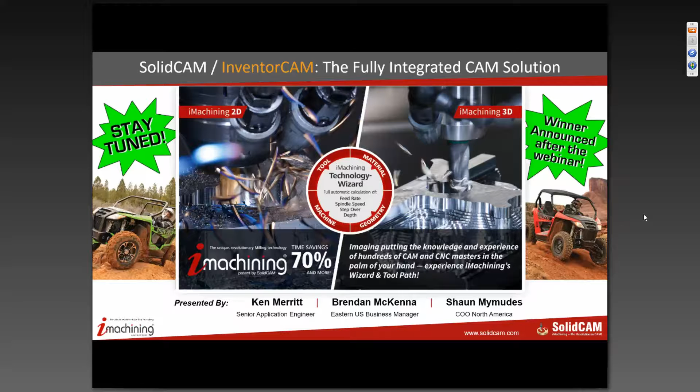This will feature a live cutting demonstration that highlights the advantages of an integrated CAD-CAM system, and in particular the advantages of the company's iMachining technology. This technology can lead to reduced cycle times and tool wear, and it can also simplify programming and enable automated calculation of optimal machining parameters, which we'll see during the demo.

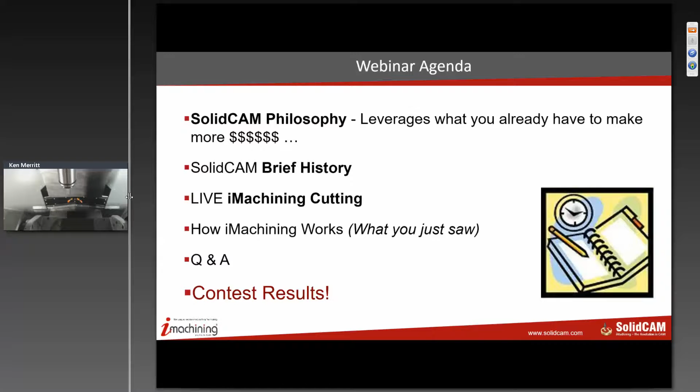So let's start. SolidCAM philosophy, if you ever talk to the owner, which I do often, I do have that privilege, and he's constantly saying our goal is to allow customers to do more with what they already have. And I think that's what sets us apart, is that we're not going to talk about the new stuff that you need, and if you had this, you could do this. The idea is to do more with what you already have, and I think you're going to find that refreshing.

Now, the first thing is, he did start off with his own CAD company, and he was doing CAM and CAD, and then he decided, hey, there's a wonderful program out there called SolidWorks. You folks may have heard of it, and we were one of the first to be a certified gold partner. And that is a huge start for us, because we said, well, let's let people use that great CAD system they already have to be able to do more, basically putting the CAM functionality right at their fingertips. So we were awarded the gold partner status, and then we were actually given the ability to sell an OEM bundle so that SolidCAM can go ahead, and if you do want the SolidWorks, if you don't already have it, you can do both.

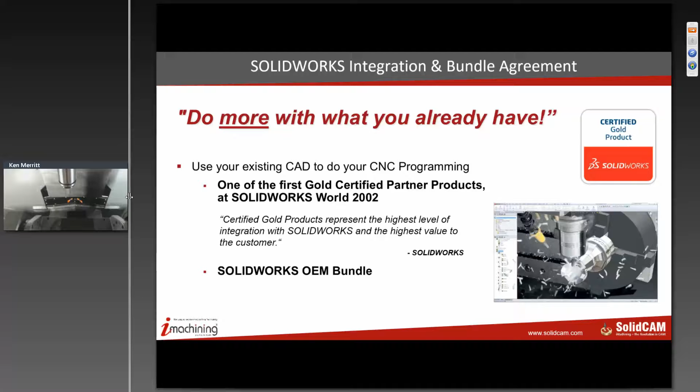Now, the benefits of SolidCAM as a SolidWorks Gold product is that it's the same style graphical user interface. It's going to feel the same to you. We do have other products we're going to talk about the integration, and it does hold to those as well. But if you know SolidWorks, I like to say you already know half our program. So if you have a different CAD system and you're going to use InventorCAM, for instance, you know half that program. By working directly on the model, you're not going to have any conversion errors, no import-export nightmares, no rebuilding data. There's no loss of GD&T data as well. And one of my favorite things is that SolidCAM extends the associativity all the way down to the G code. So if you make a parametric change to your model, you're not starting over. That's a huge benefit, because you can basically make the change and watch your G code automatically update.

So whether it's turning, mill-turn, some of these real advanced machines out there, we cover that all, whether it's wire EDM, anything out there, multi-axis, 5-axis, you name it. We're going to be able to grow with, not outgrow, SolidCAM.

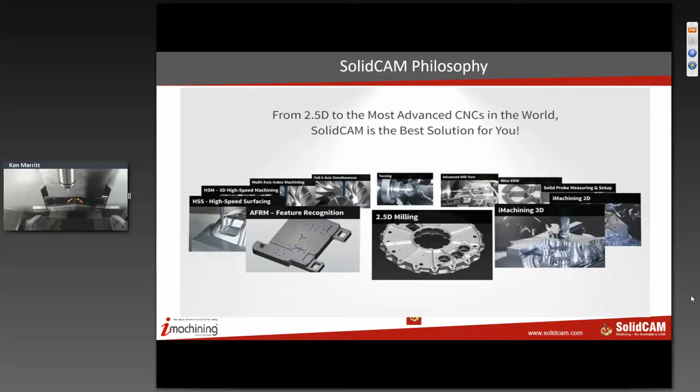Now, here's another thing: one of my customers, 034motorsport, was talking about how they loved to cut aluminum on their machine. That's all they ever thought they were going to be able to cut. But then they wanted to do stainless because their customers wanted it. So they took their existing machine, that they thought was only going to cut aluminum, and started to cut stainless. It completely changed the way they do business.

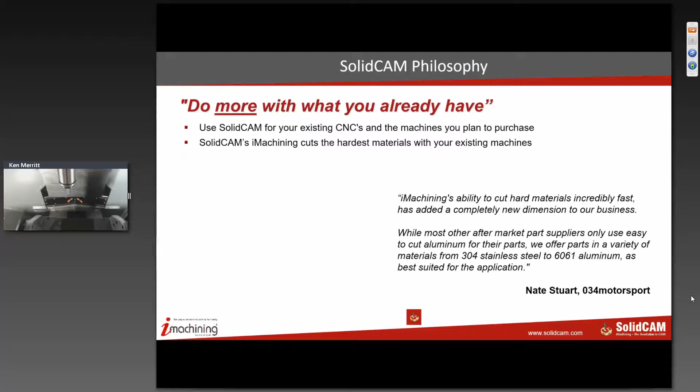Now, we also have been getting into things like ceramics. In fact, we have some ceramic companies we're working with now where they won't even talk about what's going on with the advancements we've made in that type of cutting. You'll see why later, but we have a tremendous advantage in cutting not just the hard metals, but also some of the more brittle, really hard stuff like ceramics.

So, say you're in medical and you want to use small tools, we can go ahead and use the smallest tools. I've got customers using tools that are almost too small to see, and because we protect the tool and how it's cutting, they can use them easily.

And Ken's going to show you a little bit about the programming productivity, you're going to spend a lot less time programming with SolidCAM. So again, those are all the things that do more with what you already have: saving the programming time, using tools that you never thought you could use on materials that you never thought you'd be able to cut, all on your existing CNC machine.

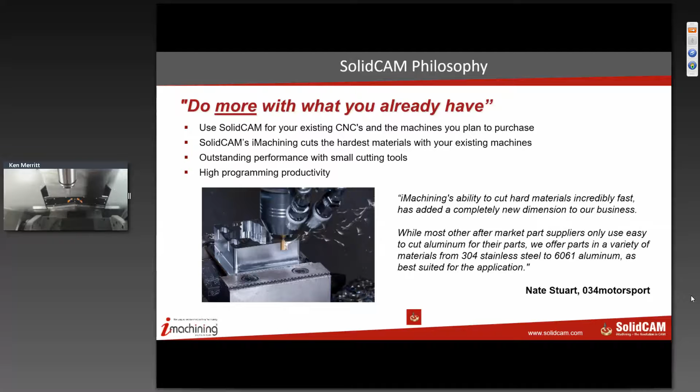Okay, so I'm going to have Brendan take it over and tell them a little bit about SolidCAM, if you would. Yeah, absolutely, Shaun. The nice thing about SolidCAM is that we are still a privately held company. That is the intention moving forward. I know as long as I'm here, that's what I'm going to do everything I can to ensure.

So that's fantastic. Why does that make us unique? Well, one of the things it really allows us to do is be very nimble and very forward-thinking without having to go through the red tape of working for some huge conglomerate of companies. We don't have those roadblocks. We can channel as many resources as possible into the software, whereas a lot of other CAM companies out there now are owned by multinational corporations. So we're very forward-thinking, very quick on our feet, very customer-centric when it comes to making changes to our system and allowing for industry trends.

Absolutely. So, again, just to continue on here with our company history, SolidCAM was founded in 1984. And, again, Shaun, I believe, had mentioned that it started as kind of a standalone product, but then back in 2002, we became a fully integrated product into SolidWorks. We became a certified gold partner with SolidWorks. And really what that means is we do have a very close working relationship with SolidWorks and their development staff.

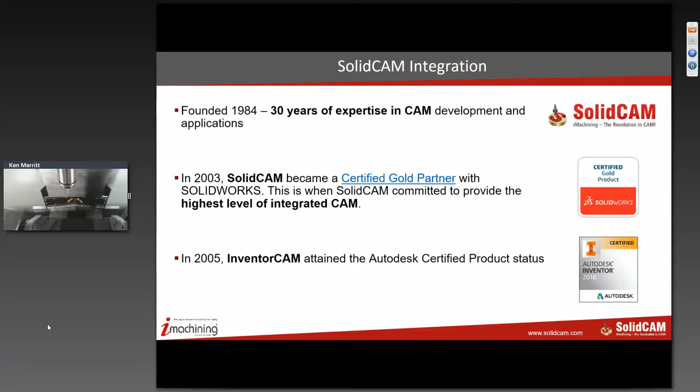So we do have a direct sales team. Ken, could you just go back real quick on that slide? Perfect. And so what we see here is we have now been a direct sales organization. We do not have a reseller channel, and there's a reason for that. It's more convenient for the customer for us to be able to provide the support directly from SolidCAM. We don't have to worry about third-party resellers, and it really allows us to maintain strict control over the software and how it's being distributed.

So we do also offer free training webinars. We do that weekly, and then we also have some of the best support that's in the business. Most of the people on our staff are either programmers or machinists or a combination of both. So it's not really just a guy sitting behind a desk going through a Rolodex trying to figure out the answer to your question. These are seasoned professionals, programmers, machinists, and I myself am very proud to be part of this team and this organization because our service and support is just absolutely hands down the best. There's no question about it.

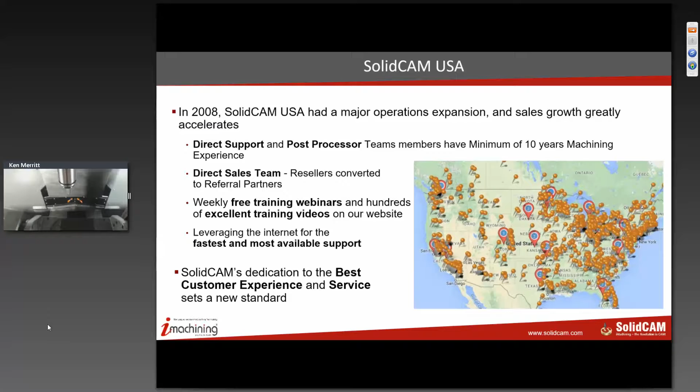And the nice part to see here, in this graphic, I really love this. This just gives you an idea of some of the customers that we have in some key areas. And this is very quickly becoming a map that you really can't see the background on anymore. And I personally am very thrilled to be able to see that. Love seeing those pins becoming more and more expansive across the nation here. That's a great graphic.

Now, we got kind of a late start, so you may not have heard of SolidCAM as often as, say, Mastercam, but boy, oh boy, will you be hearing about us shortly because our growth is just phenomenal. Well, and Sean, that's a really great point, too. You have to also think about it this way: companies like, say, Mastercam or some others spend a lot of time and a lot of money on marketing budgets, whereas they probably should be concentrating a little bit more on the software. We think that aspect of it is pretty important. So we may not have the biggest marketing budget in the world, but I'll tell you, we certainly have the best reputation. Well, and that's a great point.

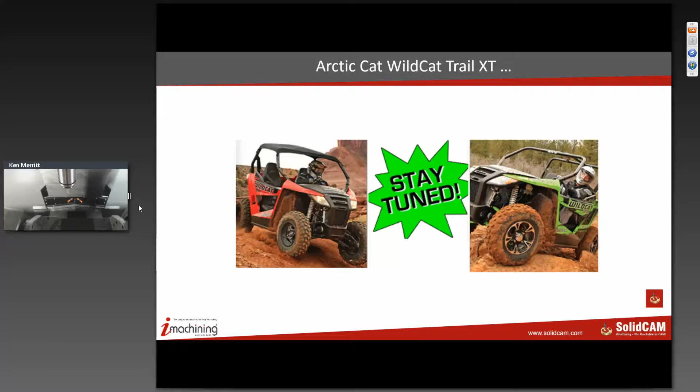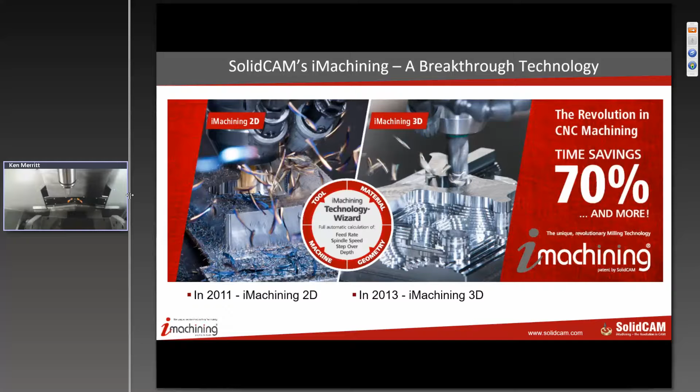All right, guys. Well, my name's Ken Merritt, and I'm hoping everybody can hear me just fine. I want to take you through what our technology is and how it works. There are actually two components of iMachining that really drive its fantastic relationship with our customers. One of them, of course, is the iMachining toolpath, second to none. It is absolutely fantastic, and we're going to spend some time going through the science today of why that works and how it works.

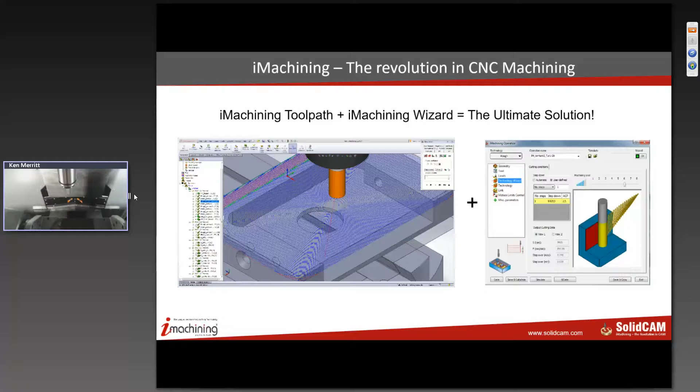The other item is the iMachining Wizard, and this makes the programming of iMachining very effective, because in a real-world scenario, in order to program the appropriate feeds and speeds, you would have to take into account a whole slew of data about the material itself. You would also have to know a bunch of stuff about your tool, what it's capable of doing. You'd also have to evaluate the geometry and try to figure out how deep you're going to run your tool in that. And of course, you would have to know not only the kinematics of your machine, but also some of the vibrational characteristics, fixturing and things of that nature. So as you can see, this could be a very complex set of parameters that you would have to figure out in order to effectively drive the iMachining toolpath at its optimum level.

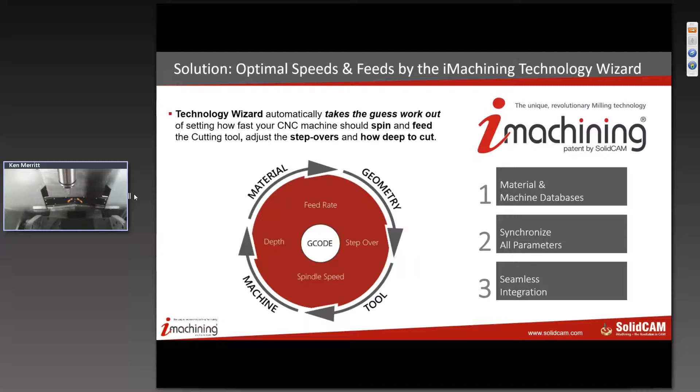Now, with the iMachining Technology Wizard, it takes all that guesswork out. It takes the information from the machine, knows the kinematics, the maximum feed rates and the spindle speeds and things of that nature. It takes the material hardness and machinability characteristics. It takes the tooling information, blends all of those into a symphony of parameters that are very coordinated to drive the tool the way you're going to see it run here in just a few moments.

One of the things that we like to talk about is finding your way through all of this stuff. If you had the fastest sports car in the world, if you don't have lights, you're not going to drive it at night, right? If you can't see where you're taking it, it doesn't matter how fast it is. It's not going to get you there.

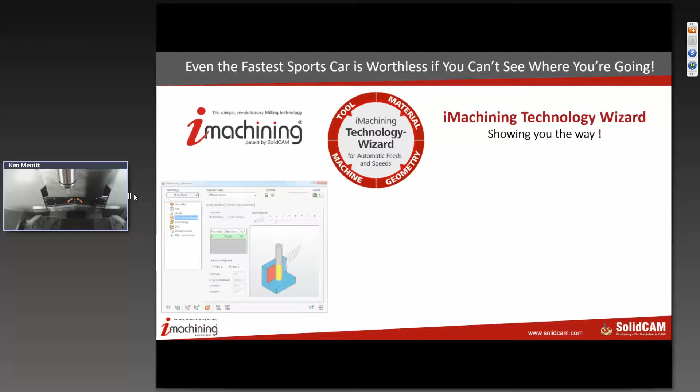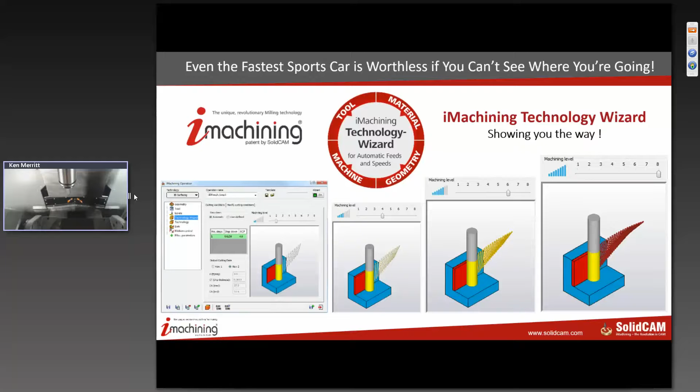So one of the things we want to take you through is this iMachining Wizard. As you can see here, because we have a pre-knowledge of the machine variables, the material variables, and the tool characteristics, we can basically set this slider from a very conservative tool path to a very aggressive tool path, and the system is automatically going to balance those parameters for us so that we can very quickly take advantage of that knowledge instead of trying to fumble around and find our way through that.

So we're going to go ahead and get into the cut right now. What we're going to do, the safety glass goggle that you see here over on the left upper corner, is a little mold core that we developed for this. And there's a couple of things that I want you to pay attention to as we're cutting, and I'll kind of point those out as we're going through this.

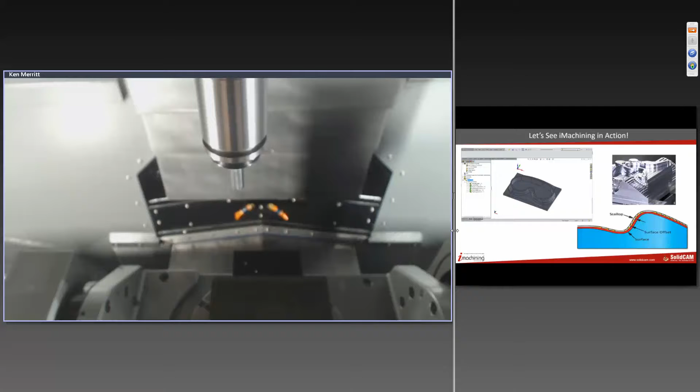Now, let me get a couple items set here on the machine, and we'll be ready to rock and roll. Okay. Now, we are in 1018 cold roll steel. That's a 6x4 block that you should be seeing in there. It's a little bit below the screen view there, but that is also a GW Schultz HGW 3/8 inch tool that you're seeing in there. And I believe we are ready to go. We're going to rock and roll. Here we go with the cut.

Now, we're going to be cutting very, very fast here, as you can see. We are at 750 thousandths total depth of cut, and we're going to be building a 3D mold core here. And so what you're going to see take place as this tool is cutting is a very, very controlled cutting angle management. Now, you can also see very clearly in the picture here that the chip ejection is extremely dynamic. And that's because we're always staying on the chip thinning side of the cut. And I'll take you through some of that physics here in a few minutes and show you how we can do that.

But we are currently cutting at 13,750 RPM on a 3/8 inch tool at anywhere between 180 and 250 inches a minute. And we're doing that at a cutting angle of 45 degrees, okay? Now, the other thing you're going to notice here is notice the repositioning moves are very, very optimized.

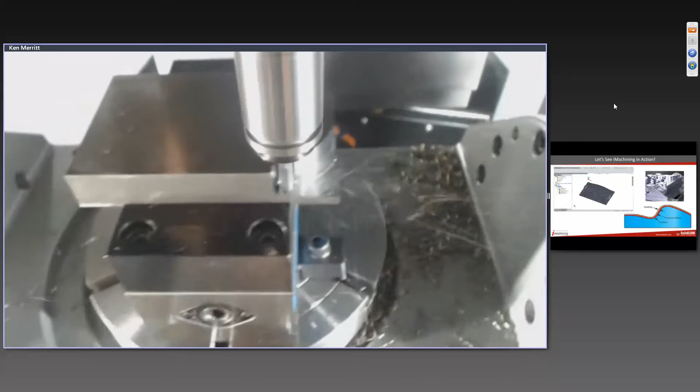What we do is during the calculation time of the algorithm, for each movement of the tool, we are automatically updating the remaining stock so that for each reposition move, we know where the material has been cut out, and we're able to move around that with what we call detour moves without forcing the system to go back up to the rapid clearance plane. This gives us a way of very, very effectively repositioning the tool in a very optimized manner.

The other thing you'll notice about this as we go further into this cut is we've done an extensive job of regionalizing the cut. Now we're going to go into the cavity portion. We cut the hole right into the model. We're going to just helix right down to 750 thousandths depth of cut. And we're already at 600 thousandths right now. And we're going to take off cutting this with what we call a spiral morph.

Now, the idea behind a spiral morph is that it keeps that tool in contact and allows us to get a much better advantage in the cut without having to reposition. But a spiral morph can only go so far within the range of the minimum and maximum cut. You'll notice it's switched into our D-slot recoil, and now it's going back into that spiral morph. See how effective that spiral morph is? When that is done correctly, you can move a lot of material really, really quickly, okay?

Now, it'll go through this again. It'll do the spiral morph as far as it can, and then when it needs to, it'll switch back into what we call our D-slot recoil, which is what you're seeing right here. And this allows us to very effectively reposition that tool, get right back into that next cut, but without ever over-engaging the tool, okay?

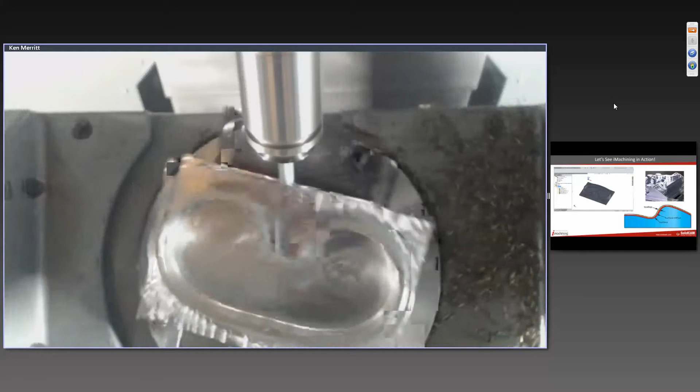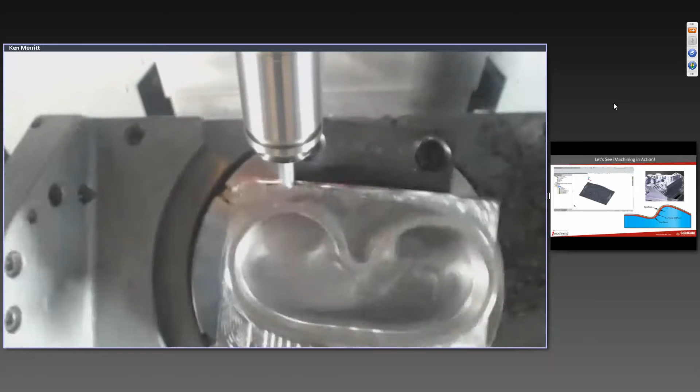However, we can still take a great advantage of a 5-axis machine because now we can tilt this over on the side of the ball, and we can use a much higher surface velocity area of the tool to do our finishing. And as you're going to see, this is going to result in a very, very nice surface finish for us while we're moving very, very fast across here. I'm at 16,000 RPM and about 180 inches a minute doing finishing. And you can already start to see that shine appearing back there.

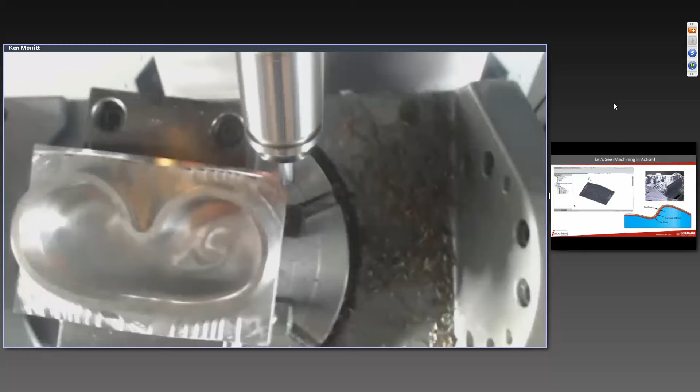We're getting a very, very nice surface finish on this because we're tilted over at 40 degrees, and we're doing a lead angle of 10 degrees on this so that we're making sure we don't ever put the tip of the ball where it has no surface velocity onto that cut. So something to think about. We not only do a fantastic job in straight 3-axis, but there's also some really powerful things you can do going into 5-axis, even if you're not dealing with engine porting or turbine blades or things of that nature.

Okay. So now let me do this. I'm gonna reach in here and turn this air down just slightly.

Yeah, and Ken, I was just going to add there, obviously for something like this, of course you could cut this with a 3-axis machine, but again, once you take this part off and you see the surface finish that you're getting, it's also going to really drastically reduce the amount of handwork that you would have to do to polish that surface. Absolutely. Yeah, there's so many benefits to it.

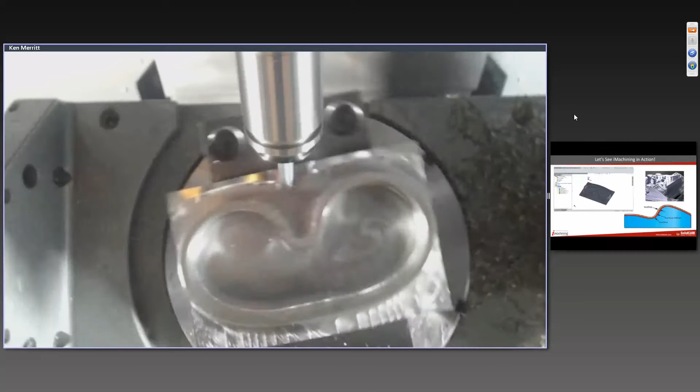It's amazing. So kind of trying to get people to think outside the box here. Just because you're not doing complex aerospace blades or vanes or anything like that doesn't mean that you can't benefit from 5-axis. And SolidCAM has an absolutely fantastic simultaneous 5-axis module that will do everything you need it to do. All right, so at this point...

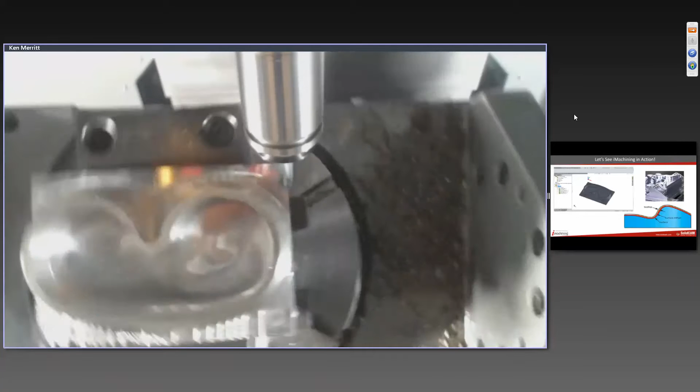Hold on for a sec, Ken. Let me just add this, that we're on a 5-axis, and it's a nice machine, and we'll talk a little bit about that later. But again, I'll bring up IMTS. We had an old Defiance mill that was meant for cutting wood and foam, and we were just absolutely running the snot out of it, and people were just shocked and amazed. So yeah, we love to call that our angry beaver. The angry beaver, exactly.

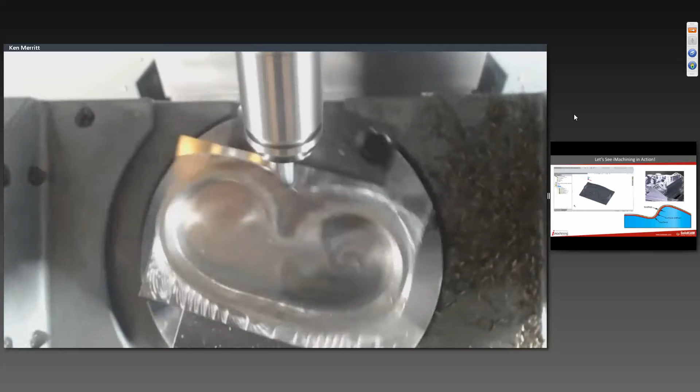And we were originally supposed to do our stuff today on a Sharp mill, a very low end mill, but unfortunately the setup didn't work out. But suffice to say that whatever machine you have, it's going to absolutely boost it beyond belief. Sure. Yeah, and Sean, that's a great point. We're going to get into some more of that philosophy as we move forward, because I'm sure a lot of people might be looking at this saying, well, geez, do I have to have a super high-end machine to make this happen? And the answer to that is no. We're going to make you more productive with what you already have. And we'll show some video of that in a little bit here.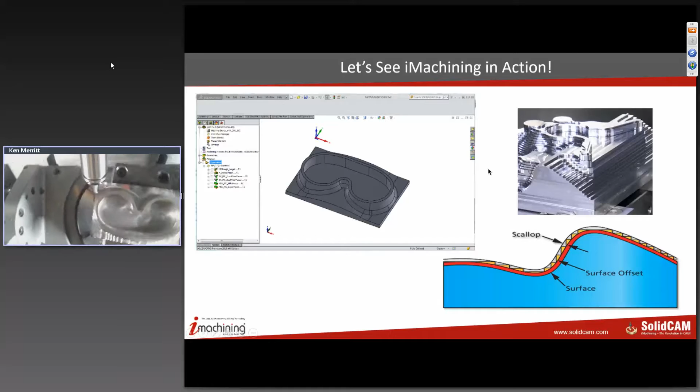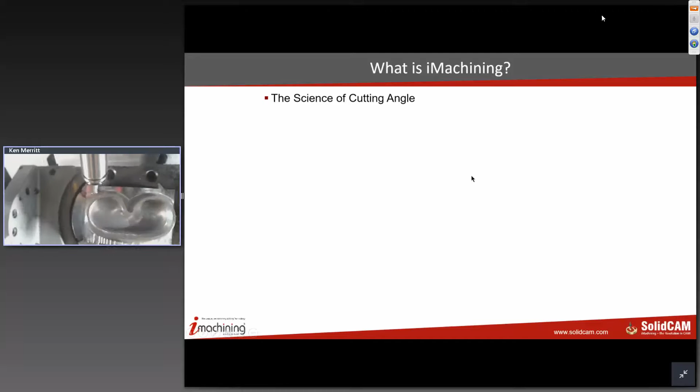Well, at this point, let's do this. Go ahead and change your screen again. Slide the bar over. Leave this open enough so you can kind of watch this. It's kind of cool to watch all this 5-axis stuff going on, and you'll see as it progresses the growing beauty of that surface finish. But let's go ahead and expand the PowerPoint back out. I want to get into the science of cutting angle and explain a little bit of the physics behind all this, so you understand that there's way more to this than the average person thinks about. Okay. So what we're doing is managing how the tool is engaged to the material, in a very specific way that helps us control a lot of the forces that are applied to the tool and consequently to the machine.

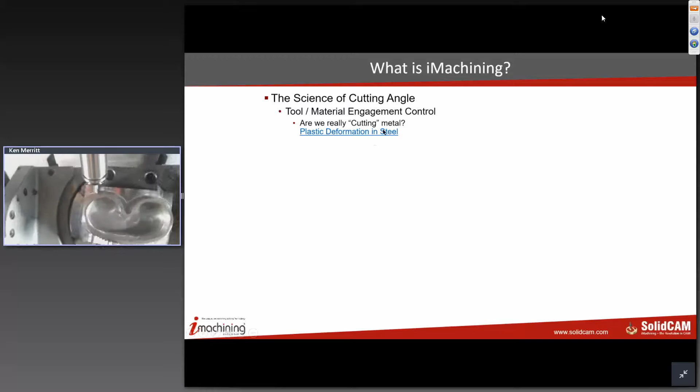Now, one of the things that I want you to be aware of, we're not really cutting steel, okay? It's kind of a misnomer when we say we're going to cut that part. What we're actually doing is what's called plastic deformation, and this video gives us a real clear image of what plastic deformation is. Now, this is a lathe insert that's passing through 1018 cold roll steel, similar to what we're cutting today. And you'll notice this is a finishing tool, 35-degree tool, and you can see under here what I want you to watch. Let me put this into rewind.

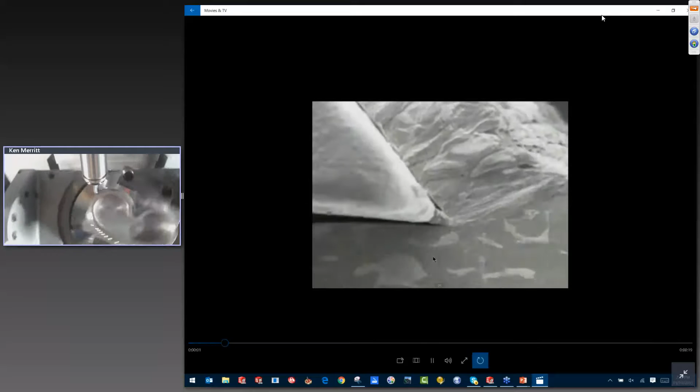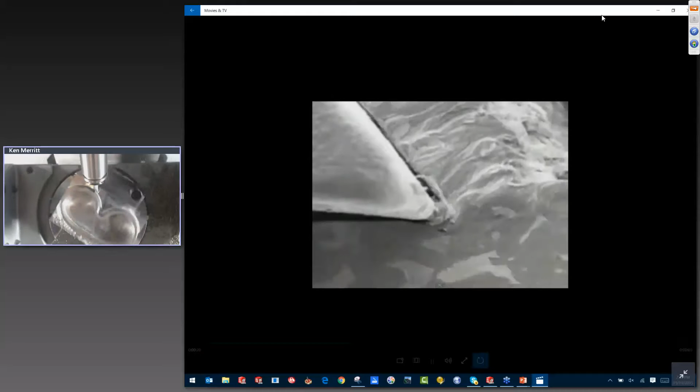You can kind of see the material sort of bend under here due to the pressure. That's what's known as elastic deformation. That's the ability of a material to be deformed from its natural state, but once the pressure is removed, it returns to its natural state without deviation. Well, what's going on up here is obviously not elastic deformation. This is plastic deformation, okay? And it's basically a chiseling action against that material.

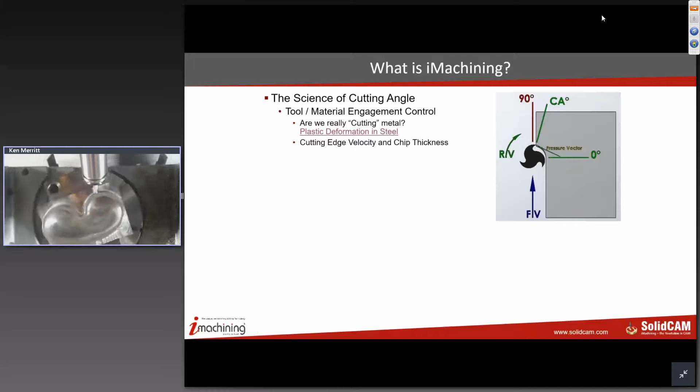So I want you to keep that in mind as we begin to discuss what is going on with the physics of what's happening during all of that cut.

Are we going to be testing later for that, just to make sure people are paying attention? Well, we might. Could we make that a criteria of whether or not they win the contest? No, I don't know, probably not. Well, let me get you into this a little bit, because I think this is pretty cool stuff.

One of the things we've noticed in practical examination over the years as we've been working on this and studying it is that as we increase the cutting edge velocity, the actual latent energy of plastic deformation goes down. That makes it much easier to remove the chip, which means we can take a thicker chip. So we have the rotational velocity of the cutting edge, and we also have the forward velocity of the tool.

When those two are in balance, the pressure vector on that tool is about like you see it here. Now think about a knife on a tomato. If you take a sharp knife and just push it straight down on a tomato, it'll cut it, but it's going to squish it too, right? But if you take that same sharp knife and drag it very fast across the tomato, the knife will virtually fall through the tomato without any effort whatsoever.

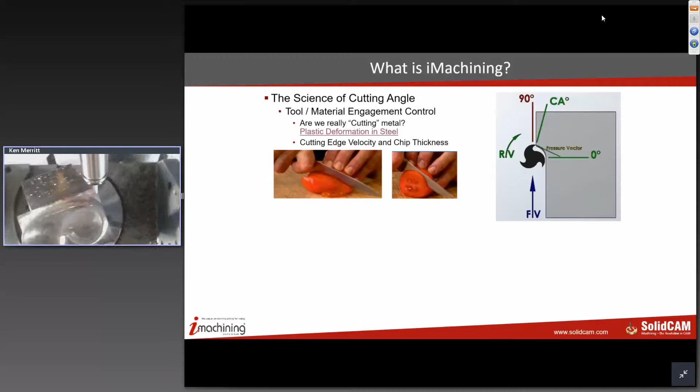That's physics. It's a little bit different, but the illustration is very much the same as what we're talking about today. As you increase the cutting edge velocity on the flute, you decrease the amount of energy necessary to remove the chip. Now, that allows you to increase the chip thickness, which means you can carry more heat off in the chip, which means you can increase the velocity of the cutter.

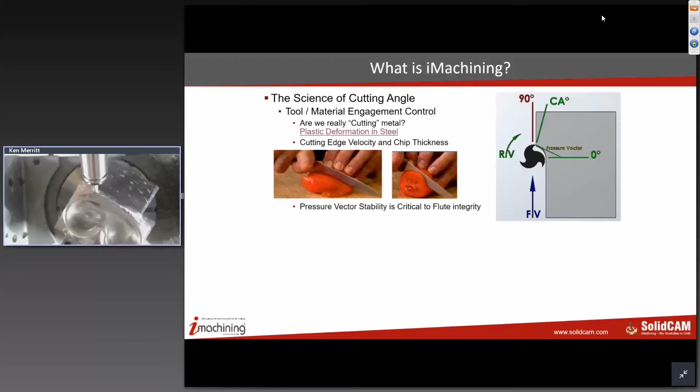It's going to generate a little bit more heat, but you can then increase the size of the chip, so it takes more of that heat with it. So it's kind of a ripple effect, it rolls up on itself. And of course, there's a limit on that.

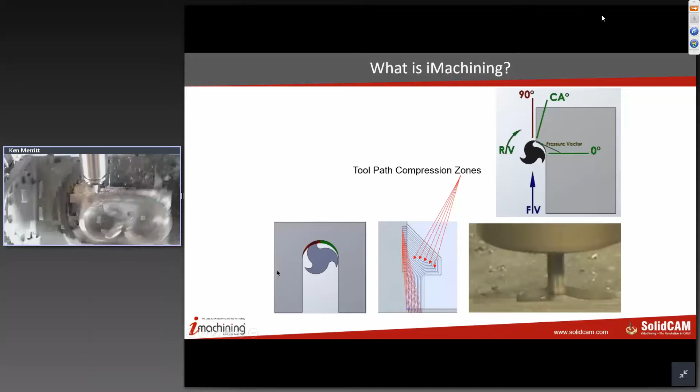But let's take a look at a traditional style of a cut. This is a traditional pocket shape. Each one of these sharp corners here, I like to call a compression zone. This is where, when the tool makes this transition, the tool becomes completely enveloped in the cut. In other words, we get into this type of a mode here, where we're in a full slot cutting condition.

Now, on the left-hand side of that cut, this chip is getting thicker and thicker and thicker as the flute advances towards the 90-degree quadrant. On the right-hand side, the chip is getting thinner and thinner and thinner.

The other thing that happens over here, think about this: as that chip is curling off, it's actually going right into the direction the tool is traveling, and so you wind up getting what's called chip compaction. Now we have conduction that is conducting the heat in that chip back into the tool and overheating the tool. And that's why for years and years we've seen the tooling manufacturers traditionally only recommend 300, maybe 400 surface feet when cutting steel.

Well guys, today we were at 1,400 surface feet in that roughing operation. Pretty dynamic, okay? And we can do that because we're getting a very dynamic ejection over here on the right side. The chip is being ejected opposite the direction of the tool, therefore carrying all the heat out with it.

Now, the other thing that happens is as the tool is cutting here, the pressure vector, when it starts out, is pushing virtually directly opposite the direction of the tool, and it creates a linear or deflective force on the tool, which is one of the reasons we've never been able to go deep, because we wind up breaking the tool off from putting so much linear force on it.

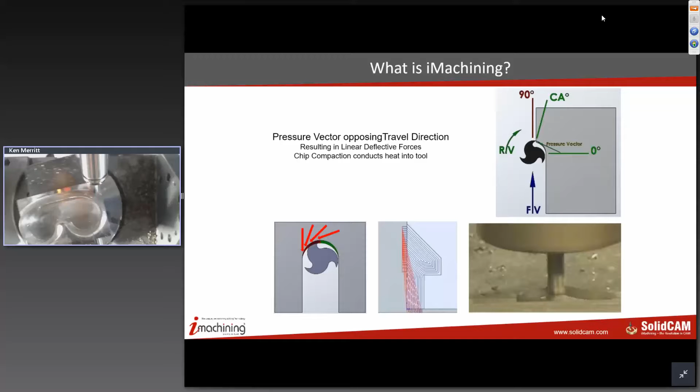Also, as you can see, once we reach the thickest part of the chip here at the quadrant, the pressure vector is pushing virtually perpendicular to the direction the tool is traveling. That creates that flex. We've always had to come back and take a flex cut because of that. So we wanted to get rid of all of that, but there's also something else that happens right here that is very, very powerful.

For an instant in time, when that flute crosses the 90-degree quadrant, the effective rotational velocity of the cutter, as it relates to the forward velocity, becomes zero for an instant, but we still have forward velocity on the tool, so that pressure vector flips to the outside, and now we're pushing inward on that flute, causing it to break. It also creates harmonic vibration, which you've all seen.

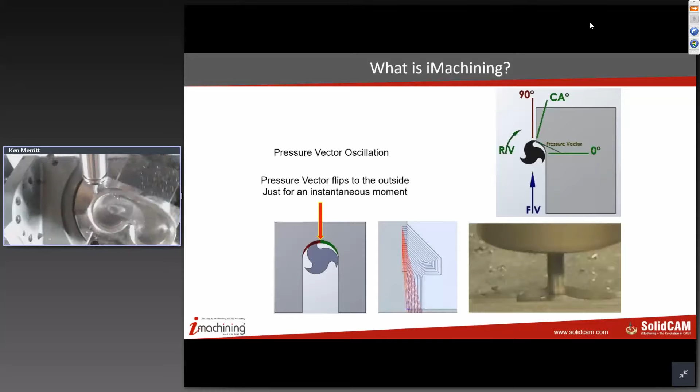What you noticed, if you could hear it today, is that tool never sounded like it was chattering because it never sees this flip. That's because our algorithm limits it to 80 degrees of cutting angle and 10 degrees on the minimum. We've noticed over all our tests that somewhere between 85 and 90 degrees, we begin to see that increase in harmonic vibration relative to approaching that quadrant, that vector flip.

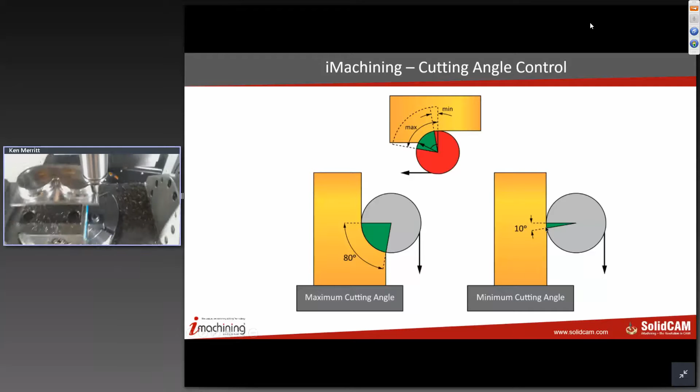So we kept it below 80 so we don't run into that. Below 10, we never want to see a cutting angle because then we get into a situation, like the video I showed at the beginning, where we're using plastic deformation. We have to have a chiseling action to remove that chip. If we just bounce off the surface, all we're doing is burnishing and dulling that cutting edge, and that's not good either. Not to mention that at 10 degrees, it's not a very efficient cut. So we control all of that with our algorithm. That's one of the things it does very powerfully.

Now I want to talk a little bit about a traditional tool path and some of the problems we have with it. Because it's a parallel offset roughing path, notice all these sharp corners. Everywhere that tool changes direction, we get into those compression zones, and because of that, the increased linear pressures, increased forces on the tool, the compaction, the increased heat—we can only go so deep, and that means most of our tool we're not getting to use.

We'll show you a video here in a little bit that demonstrates that as well. Also, over the years, one of the things we did—almost every software on the planet did this—was create a function called trochoidal milling, which creates little loops that go into those compression zones in an attempt to reduce some of those negative pressures on the tool. That worked a little bit. It wasn't really the right thing to do, but we didn't know any better years ago.

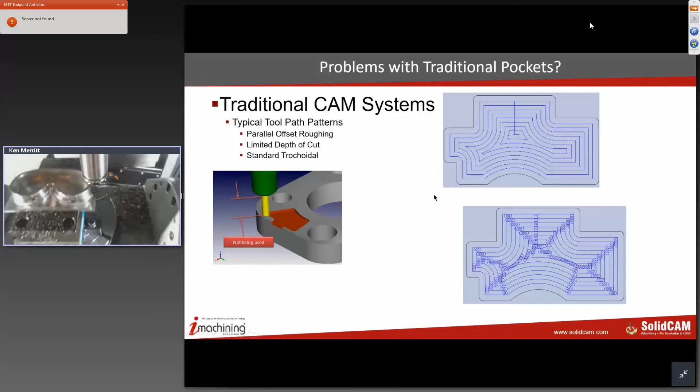Then we came up with iMachining. Now, iMachining is a very advanced system, and it uses a completely different algorithm to control how that tool is going to function. This is our D-slot trochoidal, what I was talking about when we were seeing it on the screen. Let me walk you through it.

This is the center line of the tool. Notice that it flows down through here. At this point, it actually helixes off the surface, does a high feed rate G1 repositioning move up to here, and then helixes back in for the next cut. Does the same thing, same thing, same thing. So notice the difference here is there are no sharp corners in this tool path. There's nowhere to over-engage the tool—the cutting angle is completely managed all the time.

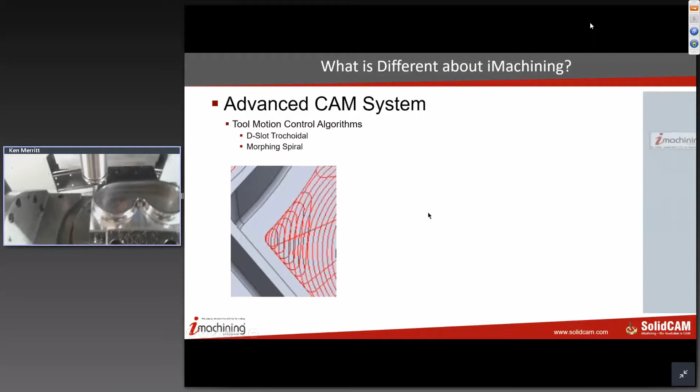Now, we do that also with the morphing spiral that I talked about. The best thing about the morphing spiral is the tool is always in contact. Think about it—if the tool is repositioning, it's in the air, you're not making money. If the tool's in contact, chips are coming off, you're making money. So what we want to do is optimize that as much as possible.

Now, the spiral morph can be a two-edged sword, and I'll explain that in a moment. But one of the things we do is use these separation channels, like you see here, to split an area out to where we can spiral morph it. Now the tool can move around it. In this case, from the outside to the inside, means we never run into an internal corner again, which makes it much easier to manage that cutting angle in a way that is very effective for the toolpath. Now that's quite a difference from the traditional view, isn't it?

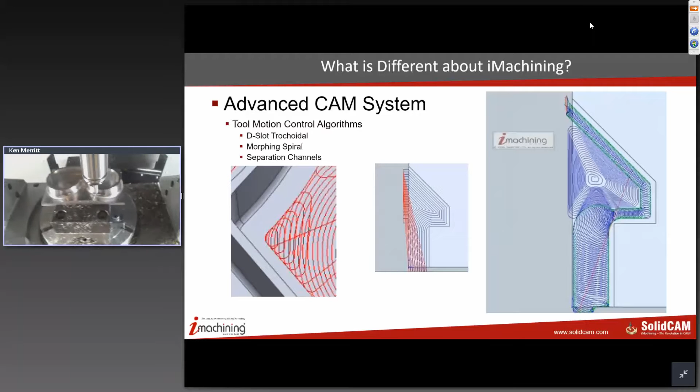It is absolutely easy to program because you basically select the geometry. Our algorithm figures out where the tool motion needs to be—you don't have to think about that. That's the beauty of the wizard: it takes into account all of these different parameters we've talked about, and uses those to establish how it needs to run all this at the depth we've chosen so as to not overload the machine, not overload the horsepower of the spindle, not overload the vibration characteristics of the spindle, and so forth. So it's a very easy programming scenario, and I can show you that in just a few minutes.

Now, I talked about the morphing spiral being a two-edged sword. I want you to understand this. If we took a long, narrow section like this and we simply peeled off that back separation channel so that we could morph all the way around to a centralized collapse point, that would become a very inefficient toolpath. Along these long sides, we would have to be at the very minimum angle in order to meet the control point here in the center, and across these short sides we'd be at the maximum, getting a very efficient cut.

But most of the cutting in that case would be done at or very near the minimum cutting angle and be very inefficient. So what we did is we created another function in our algorithm that automatically analyzes this—again, not something you have to figure out, no containment boundaries or anything like that. The system looks at the topology of the area and automatically calculates where to break up the zone to create more symmetric regions where we can do the spiral morph at or very near the maximum cutting angle, where we get maximum efficiency in the cycle. So it's a very powerful feature in the system.

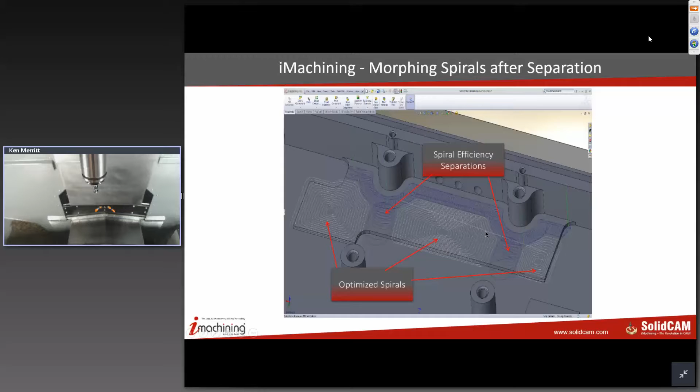Now, we also put a priority on the morphing. If we can morph, we will. So in this case, we're showing an inside-out, but we start off with morphing. We're going to deal with what we got to deal with—if there's islands, if there's regions that need to be D-slot trochoidal or channel separated, we're going to do that. But if we can, we're going to switch back into the morphing spiral because, when done correctly, it is the most effective way to remove material.

We'll deal with what we got to deal with. But if we can, even if it's just for a short period of time, we're going to switch back into morphing so that we optimize every second we can out of your toolpath for you.

Now, at some point in the course of most of our toolpaths, we have to switch back into final parallel passes, the D-slot trochoidal. However, one of the things that makes us a very, very strong system is because we can use that minimum to maximum angle, we can morph these passes as well. And so these passes can stay in contact more for a longer distance and do less repositioning, again, increasing the

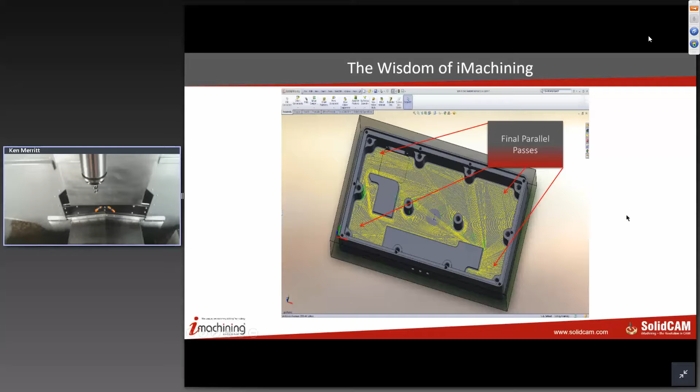efficiency of that toolpath. We also use those detour moves to try to keep the machine in cut as much as we can and quickly get back into the next cut, optimizing the region as well as the retracts. And we also support rest material. Obviously, you could use a bigger tool out here. Then the rest machine operation is going to come in and do all of our iMachining stuff only in those areas where the bigger tool didn't fit.

We also do a function called iFinish, which is very unique. And a lot of people have not found out about this yet, so I kind of want to talk about it a little bit. If this model radius is very near the tool radius, then even with only leaving 10 thousandths of stock on this wall, I can wind up chattering going through this because I actually overload the tool. It's pretty phenomenal when you study the geometry on it and how it works.

But you guys have all seen this. You've heard the chirping in the corners. You've seen the diagonal scratch lines going down through here. What that is, as that flute is going in there, it over-engages. That causes it to flex out. But that flexing out causes it to pull out of the chip. Now it bounces back against the wall and does it again with the next flute. And so you get that chirping, and you get those diagonal lines left in there. And a lot of times that bounce flex actually overcuts that wall and damages the part.

Well, with iMachining, what we do is we analyze all of those regions, find out only those areas where it would over-engage, and we go use our D-slot trochoidal method to pick those corners down to the minimum cutting angle so that when we do come through with the final finish pass, it's a very smooth cut, no over-engagement, no chatter, no chirping in the corner, and a very nice surface finish all the way through these, even with near-net surface size. Okay?

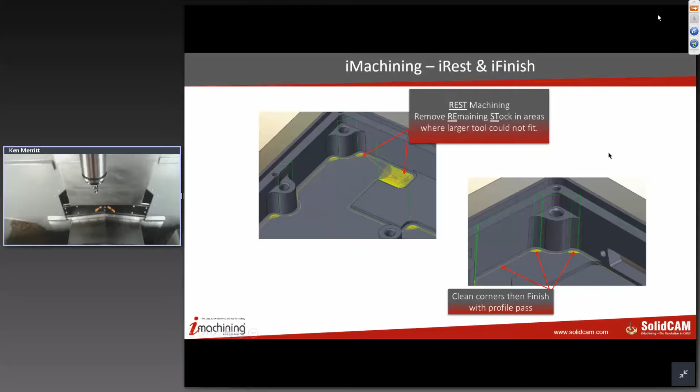Now, before we get into this, let's go back into the machine here for a moment. Notice we're done with our cut. I do want you to see some of this, so let me wheel it back down here. Brendan, it sounded like you were starting to say something. Well, yeah, I was just going to talk about the machine here, but why don't we take a look at the surface finish on this before we get into that? Maybe a good time to look at some chips too there, Ken.

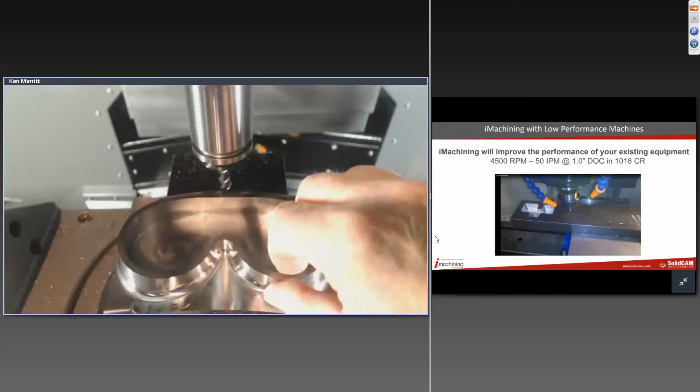Absolutely. Yeah. As you can see here, guys, the surface finish on here is absolutely beautiful in cutting this. I can't hardly feel any kind of scraping on this with my thumbnail. So I'm figuring this is probably in the 16 to 18 RA finish area. And that's with no semi-finishing operation. And I also want you to see, I'll just scatter some of these chips across here.

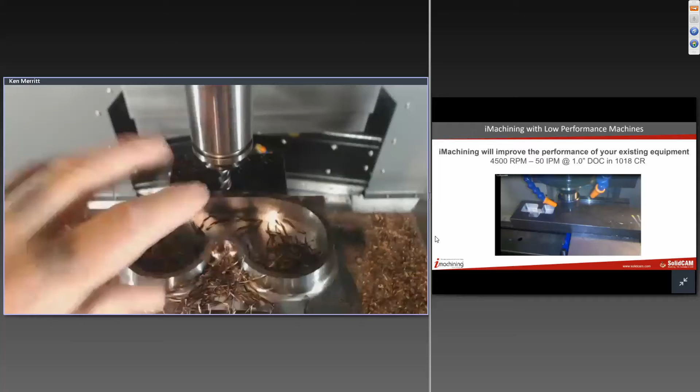And by the way, Ken had his thumbnail calibrated just a few weeks ago. So I always have it calibrated, man. I have a special tool for that calibration.

What that does for you is it keeps an extremely constant load on your tool because we're removing the same chip all the time, okay? So a very, very effective way of cutting and doing what we want to do here, okay? But very, very nice surface finish all over this.

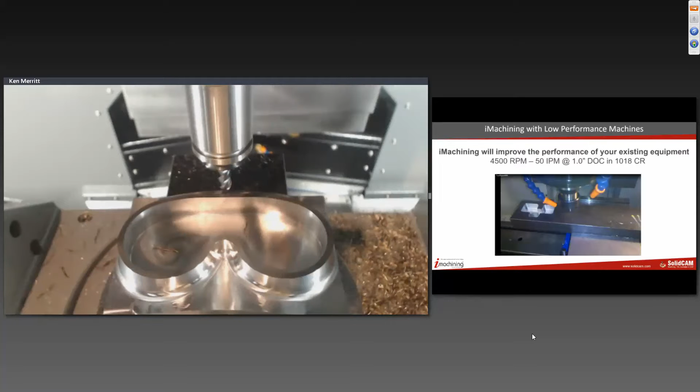Yeah, and that's a great point, Ken. And again, that translates over into, you can see here, we've got a picture on the right-hand side here of a machine that is, let's just say, far less performance than the machine that you just witnessed live. That's being kind and courteous, my friend.

It's really kind of interesting. I talk to many of my customers who are using machinery that is, quite frankly, probably older than I am, and it's older than Ken, even, if you can believe that.

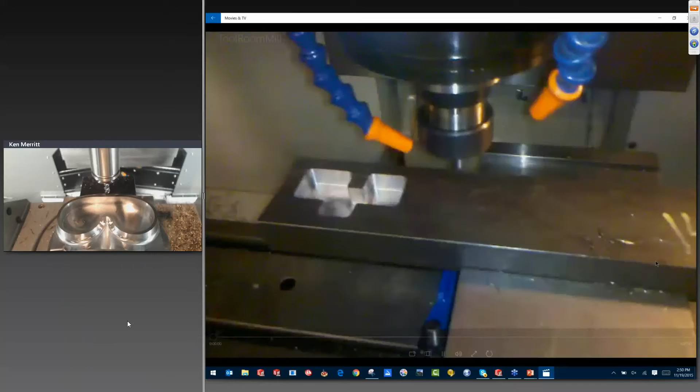Hey! So, did they have machines back then? I don't think so. I thought it was like the hammer and chisel method back then.

But the question that we get quite often is, do I have to go out and buy a $200,000, $300,000, $400,000 machine in order to have iMachining work for me? And the answer to that question is a resounding no. A resounding no. Yeah, and this video is a great story, and I'll let Ken tell the story here. But this really shows the tremendous capabilities of iMachining and what it can do for your existing machinery, even older machinery.

Yeah, and guys, this is not a real sexy video, as you can see. But let me give you the story background on this. This is one of our customers out in Colorado. They called me up and said, "Hey, look, I need to do something better." This is an old TM1, or might have been a TM2, Haas tool room mill, open bed mill. Thing's been rode hard and put away wet many a time. It's rickety. The spindle's not very sturdy. It only has a 4,500 RPM spindle.

It can only go about 50 inches a minute before it gets into, as you can see, hesitating going around here. I'm using all 50 inches a minute of it, but it gets into hesitation when it's doing that. Now, this pocket over here, he was cutting his traditional way, and he was showing me what he was doing. He had to cut this.

This is a 3/8 inch tool, and by the way, he even went so far as to buy some pretty decent tools. He was using an OSG Exocarb 3150, in a 3/8 version, 3-fluter, that is a $68 tool or thereabouts. Pretty decent tool. But he could only do this at 2,200 RPM, 18 inches a minute, and 50 thousandths depth of cut. So with a 1-inch depth of cut, actually, I think, 985 thousandths, he wound up having to do 20 passes to accomplish that.

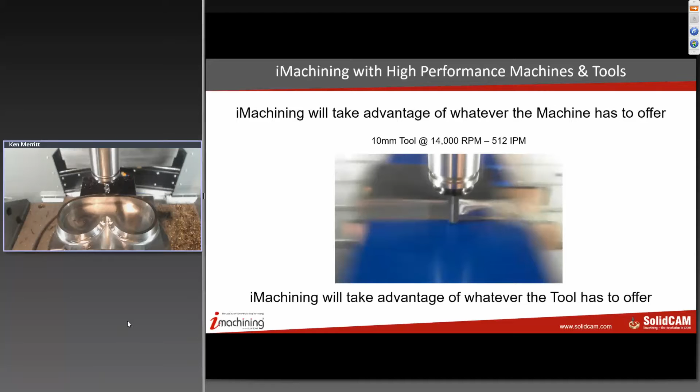So, some people would look at the way this machines and they look how fast it is and they go, wow, that's great. But you have to kind of take a deeper look to see what this is actually doing for you. And once you see it and you apply it to what you have currently, that's when really kind of the light bulb goes off and people go, wow, this is just really great stuff.

Now, if you want to get crazy, and I've been accused of being a little crazy from time to time. Let's get crazy, Ken. Let me show you this one. All the time. And let me tell you, I was laughing the entire time I was cutting this.

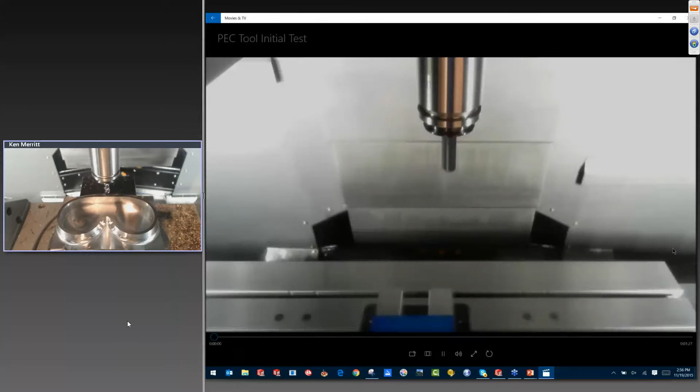This is a tool that we've designed. It's got a parabolic ejection cavity, and I had pushed this already on the machine at 350 inches a minute at 12,000 RPM and 60 degrees of cutting angle, and it wasn't even breathing hard. And so I decided, well, let's take it up a little bit and let's see what we can do. Running 14,000 RPM. This is a 10 millimeter tool. 14,000 RPM and 512 inches a minute at 55 degrees cutting angle. That's over 1,472 surface feet on this tool.

This is a 3x5 block of steel. We're going to take this down to next to nothing in a very, very short amount of time. And this, by the way, is the second cut on this tool. Okay, and as I said, I was kind of laughing the whole time because I fully expected this tool to break. I was pushing it to its maximum limit and trying to find out where that limit was, and it already cut one. I was like, all right, let's cut another one, see if we can do another one. And so here it is on the second one, and it's still just tearing it up, okay?

Now, obviously, this is not something I do in production, but wanting to find out what it could do, I decided to push it to its maximum limit. But look at what we've done here on this machine with iMachining's toolpath. We did all of that cutting on a 3x5 at 800 thousandths depth of cut in 1 minute and 27 seconds. It's pretty phenomenal.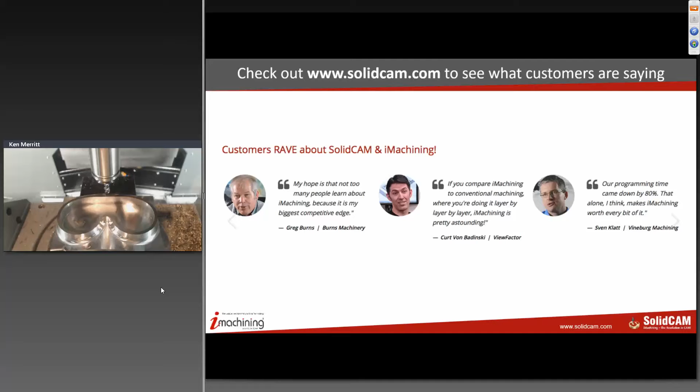You know what really makes me happy is when I go to YouTube and I type in iMachining and I see some of our customers posting. Now, the language is a little more colorful than the ones we've used on our website, but there is nothing that I get a bigger kick out of than to hear how just incredibly shocked and happy they are with the results of using iMachining.

Yeah, Brendan, tell them about your favorite YouTube video. Oh yeah, well there is one that I found, Sean. It's great. It's a cell phone video, and this guy was machining just like crazy, and I couldn't believe it. And then he actually started clapping at the end of the cycle. It was one of the funniest things. I loved it.

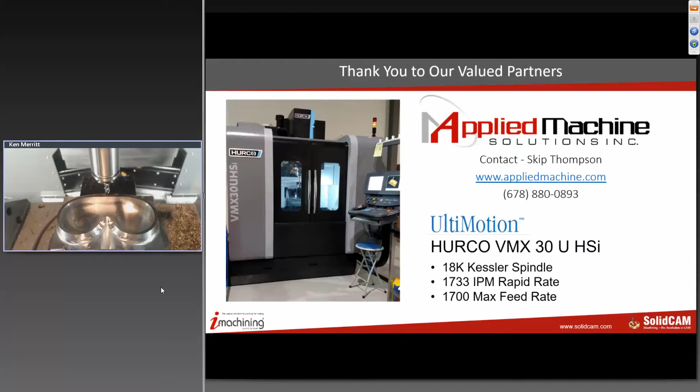And there was a question about machines earlier. We have a staff of post writers. I think there's 7 people on that in the U.S., and that's what they do for a living. Because one of the biggest complaints we hear, why do people come to SolidCAM? A lot of times it's because they can't get a decent post for their machine. They've been promised a library post or an off-the-shelf or a certified post.

I can tell you right now, 2 machines that leave the dock and go to 2 different resellers from the same manufacturer can be configured entirely different. And that's one of the big differences, is that we make sure that the post specifically for that machine is working. So no matter what machine you have, that's something that we can definitely help with. Yeah, we'll work with you to dial it into your satisfaction.

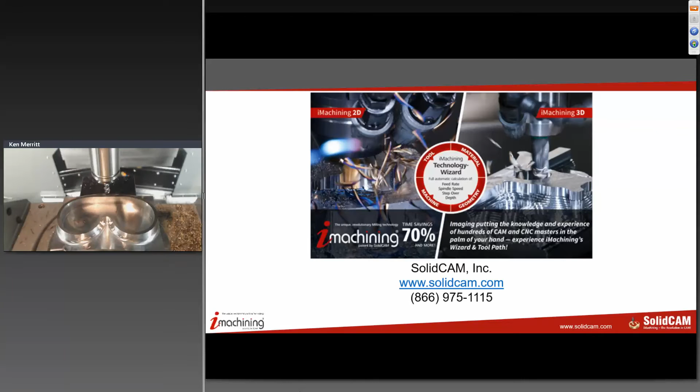Everybody on there going, get to it. They're 7 minutes over, come on. You want to give away the money, don't you? Well, no, I don't. I actually don't, but I think we need to.

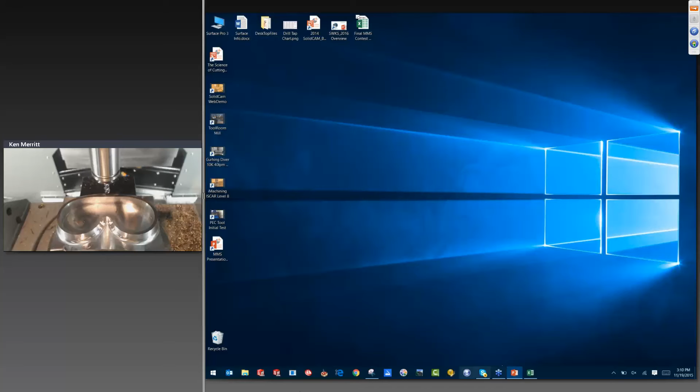I'm sure he's asking, is there a way to make it flavored to their way of doing it without having to pay? A lot of competitive software will force you to come back and pay them to edit your posts. So no, our posts are wide open. The whole idea behind SolidCAM is we don't want to see people at the machine editing code, because if they're editing code, that means the post isn't dialed in correctly or something's not working correctly. We want this thing to be as seamless to your machine as possible.

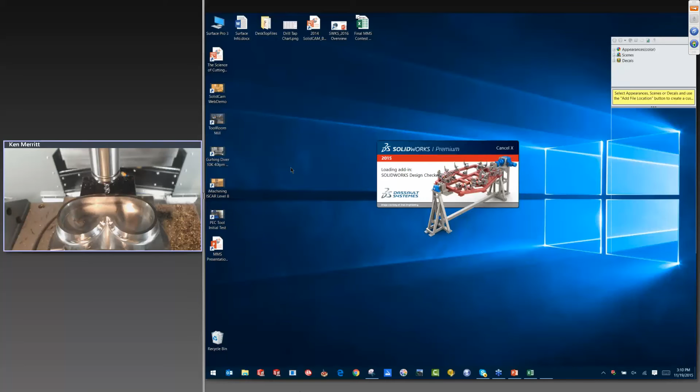Speaking about posts, this person would like to know if you provide posts for small CNC routers. Yes, absolutely. We've got a library of literally hundreds and hundreds of posts. One of those will probably be very near what they want, and we can make edits to make it closer. Exactly, we always edit them.

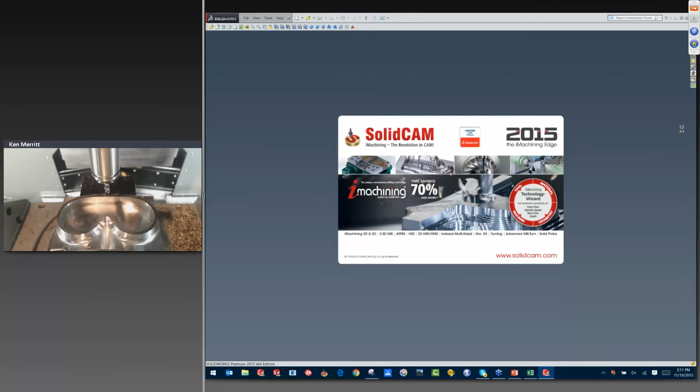Another question: what makes you different than what some are calling peel milling? Very good question, there are several differences. A lot of systems out there nowadays claim they do the same thing as iMachining because they do narrow radial engagement and high feed rates. However, we've patented several of our characteristics so nobody else can do those: the minimum to maximum cutting angle, the morphing spiral, the detour repositioning moves, and the ACP, axial contact point characteristics of our system. Those are all patented features. So everybody else is basically doing either a single cutting angle engagement, or a standard constant radial engagement of the cut. The toolpath patterns may look somewhat similar, but they're not the same. They don't have the channel separations, they don't have the feed rate modulation for the cutting angle. Most everyone manages the feed rate based on chip load, where we're managing it based on chip thickness, which is the wizard. Yeah, and don't forget the wizard.

Absolutely, the wizard's a huge part of all of that, which makes it very easy to set the system up to make it do what you want. Let me show you real quick. In the operation we were running today, this technology wizard gives us the ability to very easily decide to run very mellow or very aggressive, whichever you want. Because we've captured machine data, material data, and tooling characteristics, we can marry all those parameters together in a way that's much easier to set up. That's why we patented the wizard. So I hope that answers that question.

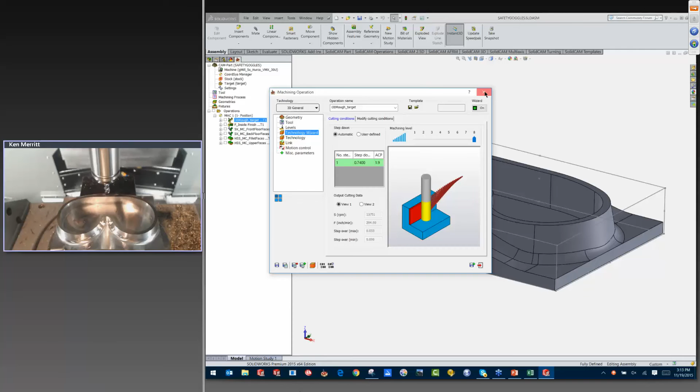Yeah, another question here. In terms of the types of end mills that are probably most appropriate for this type of toolpath, what can you talk about in terms of that?

In general, virtually any end mill is acceptable for this. Comparing a traditional toolpath versus an iMachining toolpath, iMachining is going to make that tool perform significantly better than in a traditional situation. However, you'll gain more performance going to higher grade tooling — micrograin carbides, sophisticated coatings like AlTiN, nACRo, or TiAlN. Higher helix angles give us better shearing force and allow us to carry more chip thickness, which carries more heat off. So I'd suggest high-grade carbide with higher helix angles.

The tool we were using today was not as high a helix angle as the one I ran really fast. However, it was variably indexed with a variable helix angle, which made it run really quiet. So virtually any tool is going to perform much better in iMachining, but the higher performance tools are definitely going to perform higher.